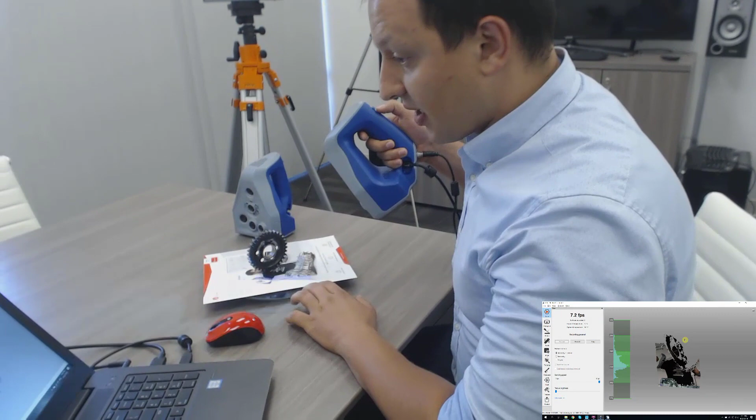So let's take a look at the scanning process with the scanner. Here we have the Artec software, and we're going to start capturing this part. Now we deliberately chose this part because, as you can see, it is a black part and has some reflective portions to make it a little harder. And we're not going to capture the entire part, although we could flip this part over and capture the other side.

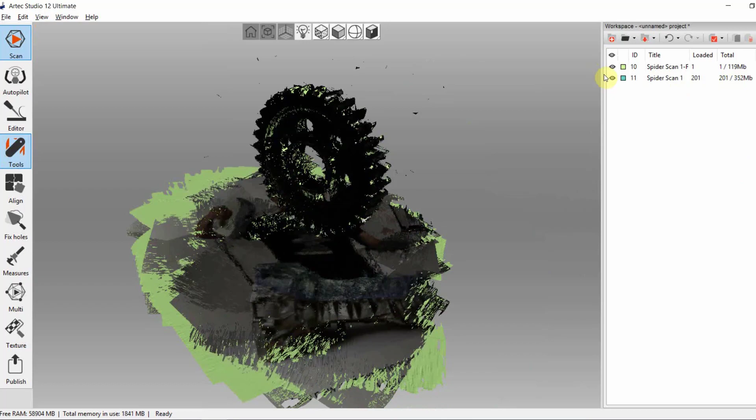So we're just capturing a quick view of this part. I could have probably done this a little bit quicker too, but this should be good enough. So there we go. We have a general overview of this data. We're going to take a look very quickly at how we would process this data here within the Artec software. So here is a preview of the file, and we could export this directly into the software, but it's always better if we process the data using the non-real-time algorithms.

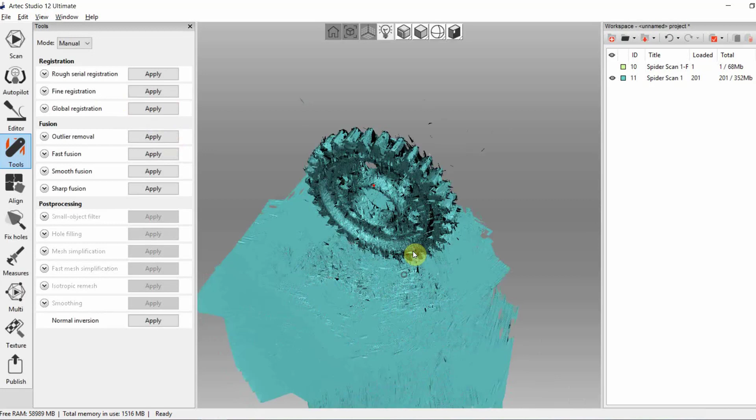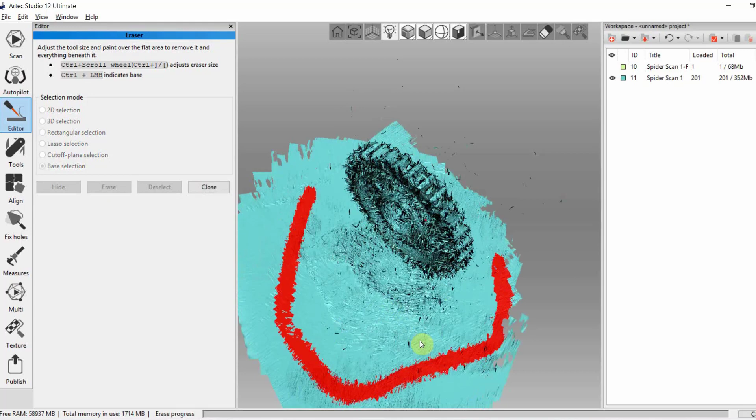So we're going through a global registration step, which takes the data that we captured and tightens the alignment between the individual frames or the individual views of this data entirely on its own without any sort of assistance from us. We can also remove the base of this part, so we don't have to deal with this extra surface within Geomagic for SOLIDWORKS.

And all we need to do now is create a file, an STL file or a mesh file from this part, which will be ready to be exported into Geomagic for SOLIDWORKS. All right, I'll hand it over to Jeff to finish this part as soon as this process completes.

Thanks, Anton. Really quick, let's go ahead and import your part. Okay. Taking a look, it doesn't look too bad. Really quick, let's talk about the UI of Geomagic for SOLIDWORKS. This is a left to right workflow. All of our tools are up here. This is an embedded plugin for SOLIDWORKS, which allows you to bring in scan data or point cloud data and work with it directly in SOLIDWORKS.

We can do that by either importing, or we can connect to some sort of hardware and then scan in either points or mesh, and then do a little bit of mesh or point optimization, and then get that aligned to the global origin, and then take cross sections of that mesh or point clouds and work with it from there. It's really quick. I'm going to do just a little bit of cleanup beforehand.

So I'm going to right click and edit this object. Then I'm going to change my selection tool to the lasso tool, and I'm going to make sure that I have select through on. And I'm just going to really quick delete out these kind of pigtails here.

And same with this area here. Good. So our order of operation today is going to be, we're going to do probably a repair and maybe a smooth, because this looks a little bit bumpy. But then we'll apply some reference geometry to send it to the global origin using Orient Mesh, and then we'll take a cross section of it and then start reverse engineering from there.

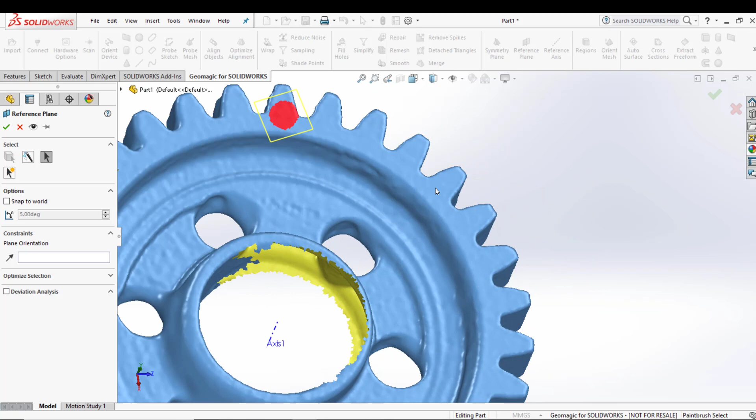Next, I'm going to apply a reference plane. So instead of using Smart Selection, this time I'm going to use General Selection, and I'm going to use the paintbrush method. So zoom in a little bit more. There we go. So I'm trying not to hit any curvature. I definitely don't want to hit anything that's not a plane.

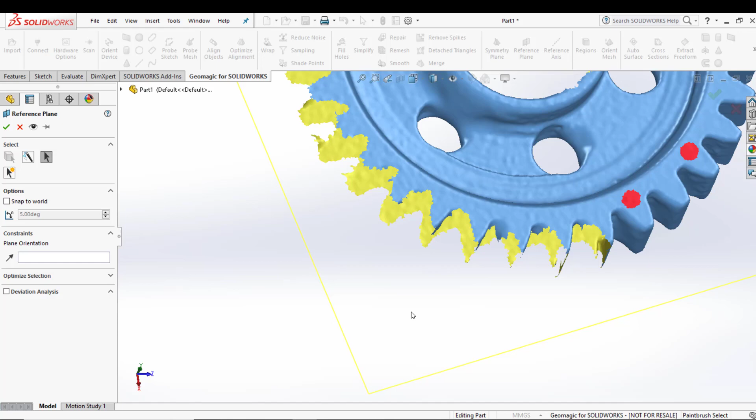And I'm just getting a couple areas here. And maybe one over here. There we go. So then when I rotate to the side, I should see that that plane is right on that edge, and it is. So I'll go ahead and say OK.

So at this point, I want to apply a point in the middle between this axis and this plane. And to do that, I need to go into SOLIDWORKS itself, because we don't have points currently. Well, it's a future release thing, but we don't currently have it. So I'll select the axis and the plane, and I'll say OK. And here we have a point right in the intersection of that axis and that plane.

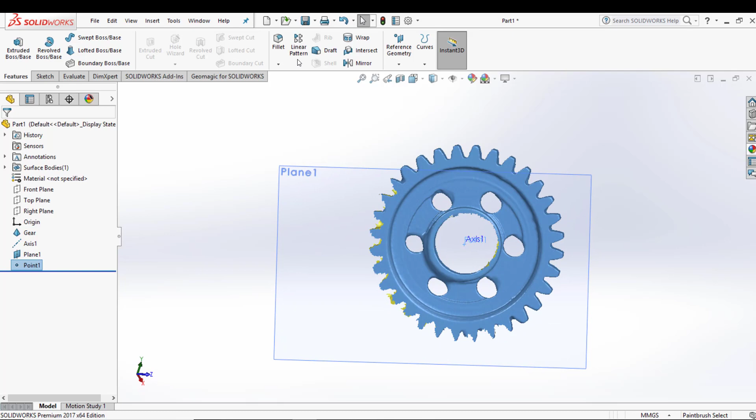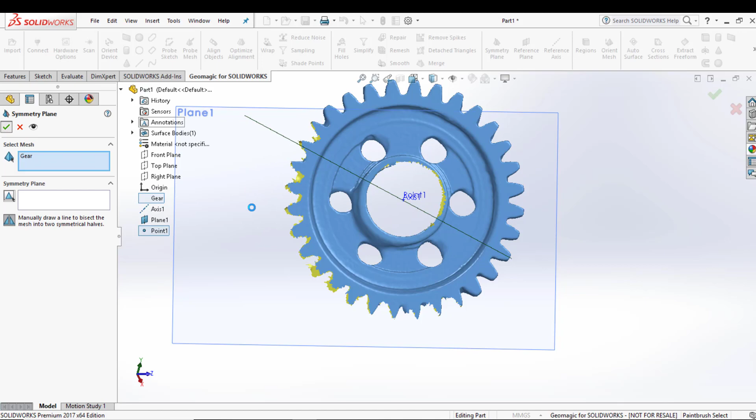Now that I have that, I'm going to go ahead and put a symmetry plane. I'll go back into Geomagic for SOLIDWORKS, and I'll choose symmetry plane, and then I'll just try and find one of these teeth that goes right through the middle, and this looks like a good one here. So I'm going to zoom out just a little bit and then just draw a line. So what this is going to do is it's going to subdivide the mesh in half and then give me that symmetry plane between the two halves.

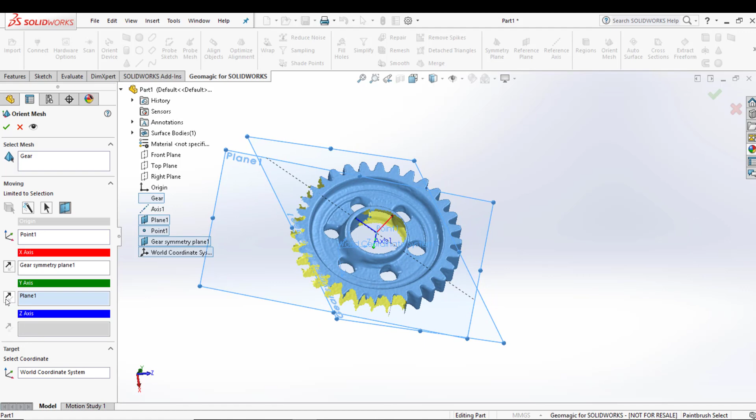Great. Now that I have all this done, I can go to Orient Mesh, and then I can choose the reference geometry accordingly. So my origin is going to be the point. My x-axis is going to be the symmetry plane. And then you can kind of see the global origin taking shape here, or where it's going to end up. And then my y-axis is going to be plane 1. And that's inverted, so I'm going to go ahead and hit this arrow so it's in the correct orientation, and I'll say OK.

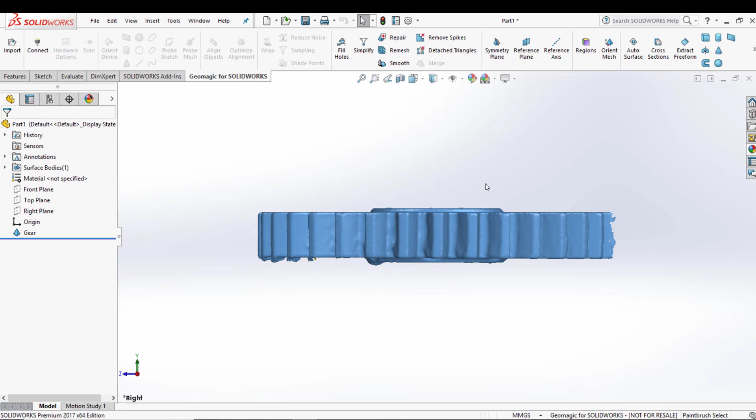So now that it's sent that to the global origin, I can go ahead and remove all of my reference data, or my reference geometry rather, and then we can use our views and see that it's in the correct orientation. Perfect. Now we can begin to reverse engineer this part.

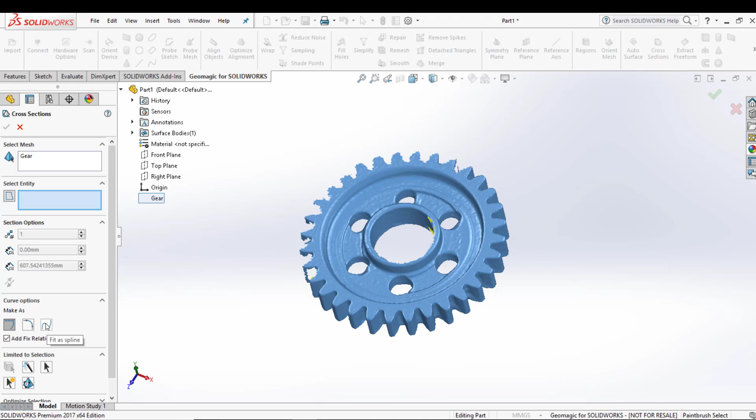So again, I'm going to use the cross section of this mesh, and I'll show you what that looks like right now. We have a couple different options in cross section. We can either use the cross section to make construction lines here, or we can tell it to fit lines and arcs, or we can tell it to fit splines. So I'm going to choose the right plane, and if I zoom in here, we can see that it's giving me a black outline along the mesh. So this is exactly what I'm looking for.

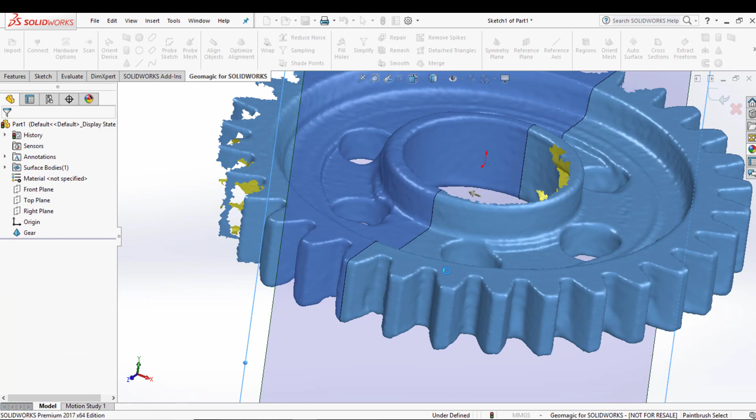So I'll go ahead and I want to do a polyline because I want to make my own lines that are perfect instead of having to worry about the mesh being slightly imperfect. So I'll go ahead and say OK. And you can see, well, maybe you can't see, it's a little difficult, but I'll go ahead and hide that. And now you can see that I have a poly outline of the mesh.

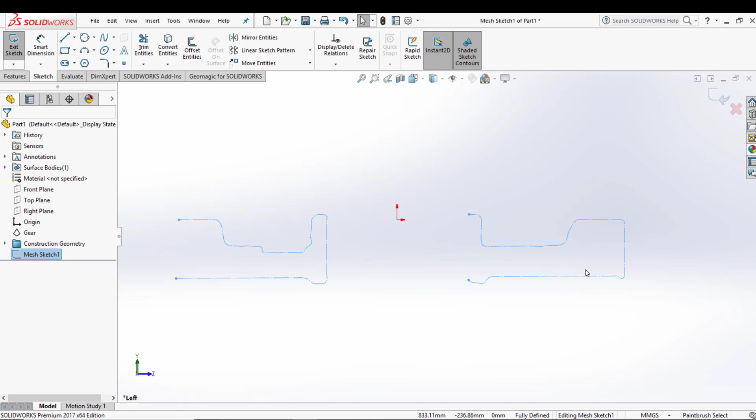I can then go in and edit that, look at the plane, and then start to rebuild it from here. And really all that is just a bunch of sketching and whatnot. So this will take just a second. And basically I'm just going to make a couple boxes. I'll draw a line or two. Oh, that one was off.

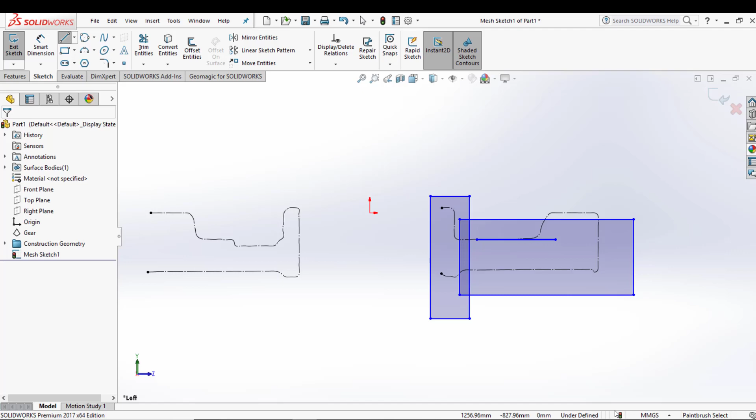Perfect. That looks pretty good. I'll just drag this down here. Move this up to about there. So on and so forth till I've got my fit how I want it. Okay, so that looks good.

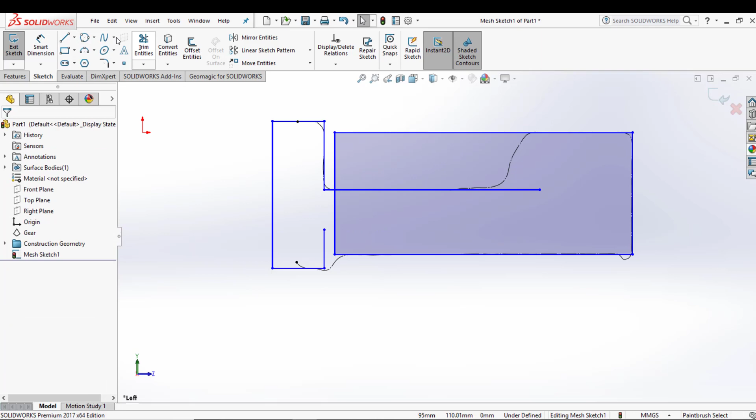Let's go ahead and do some corner trims here. That looks good. I'll add a line here. Oh, let's see. Do another corner trim. Do one more corner trim here.

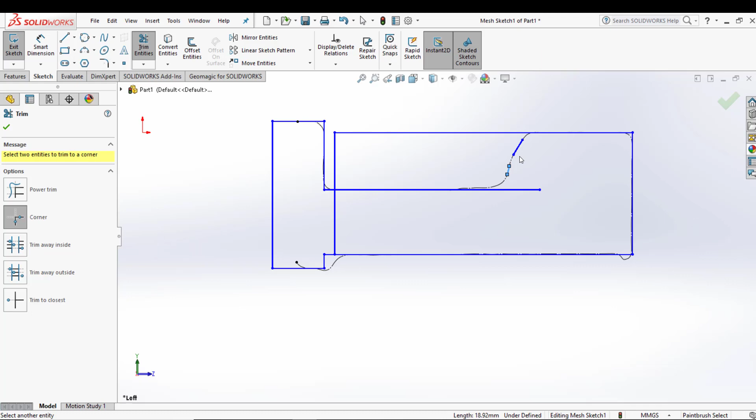Cool, and then I can apply any fillets that I want to in this part. So we can go ahead and just do a couple of them really quick.

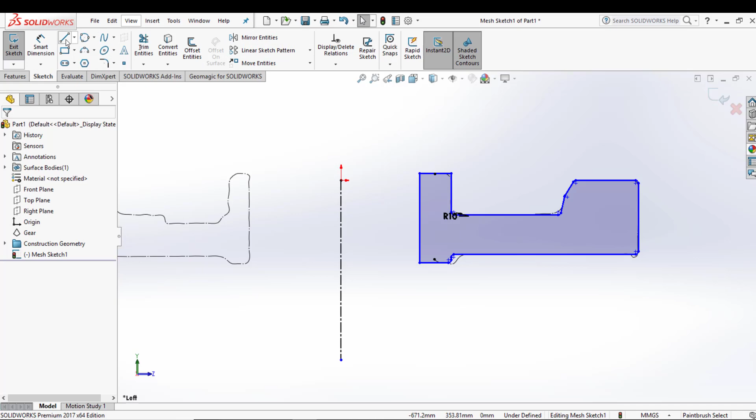And we'll notice here that we don't have the end cap, but this side does. So we'll go ahead and create a construction line. We'll mirror that line to the other side. So we've got to draw a line real quick. Select my entity, select the mirror about, puts it over there, perfect. And I'll just take this piece and move it back.

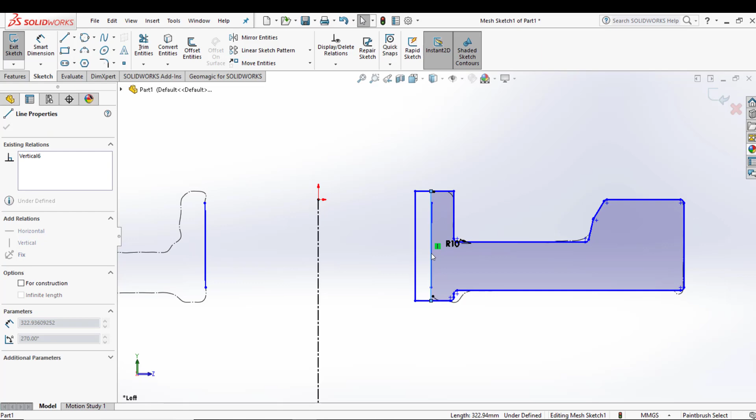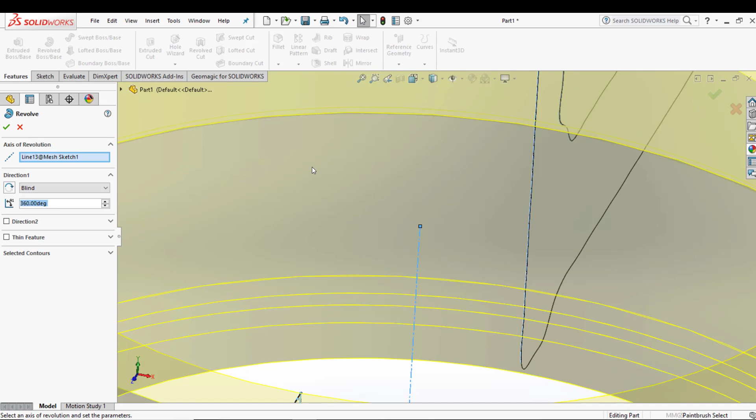Cool, I'm done with the sketch. So then I can go ahead and revolve that sketch using the SOLIDWORKS tools. And I'll say OK. And then I'll turn on my mesh and take a look.

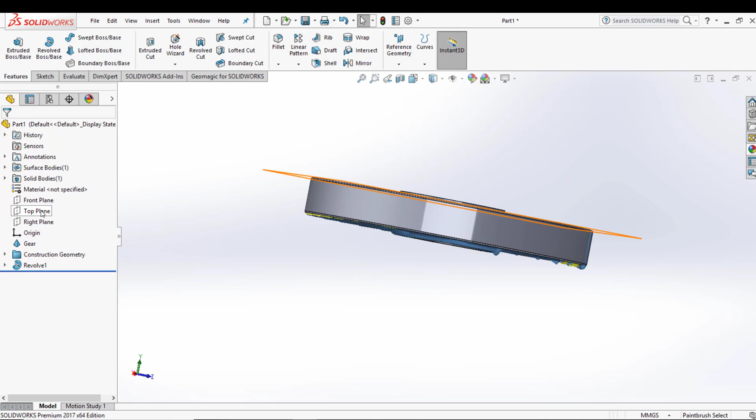And then from there on out, we can continue on adding in different features here and there. And we'll add in the teeth right now, and that should do for this demonstration. Because then it's just a matter of adding in circles and things of that nature, and that's all done in SOLIDWORKS. But this just shows you how well you can use mesh and point clouds in SOLIDWORKS instead of having to go outside.

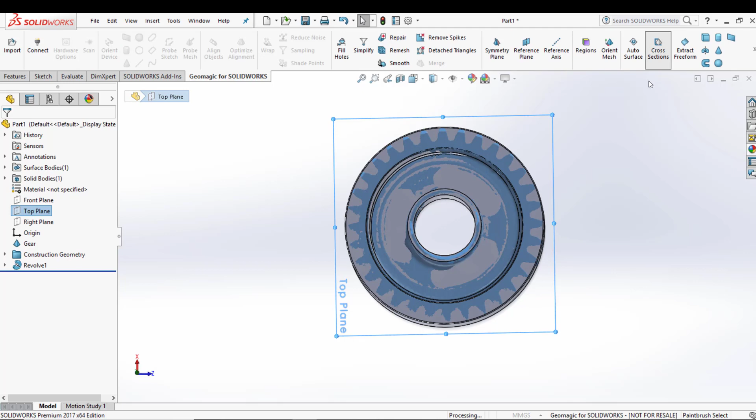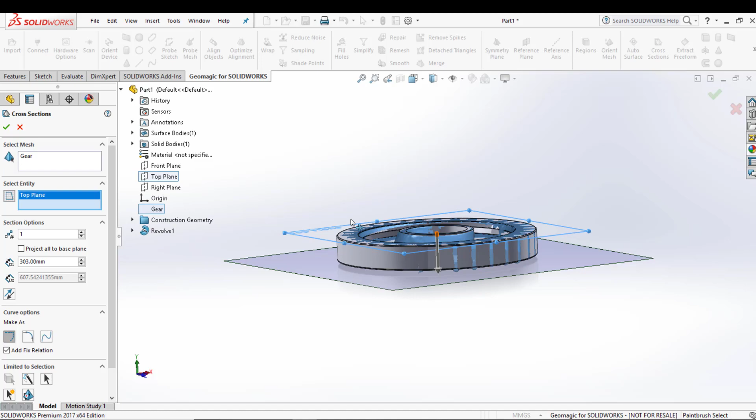So I'm going to use the top plane, go back into Geomagic for SOLIDWORKS, take a cross section using my top plane, and I'm going to use this little arrow here, and I'm going to drag that top plane down just a bit so we can really get a sense of those teeth. And that was too much, so I'm going to pull that back up a little bit. There we go. I'll go ahead and say OK to that.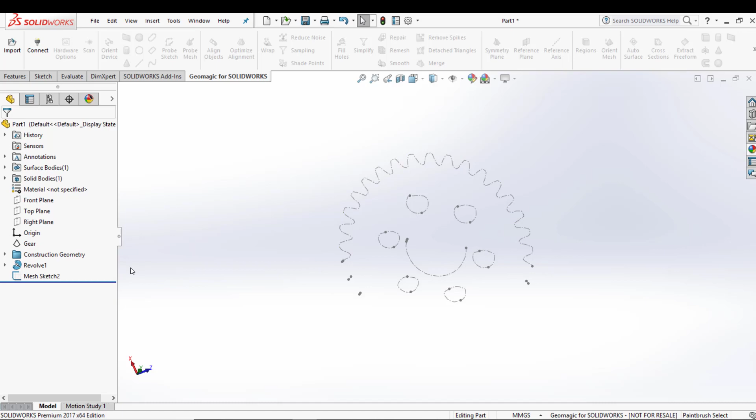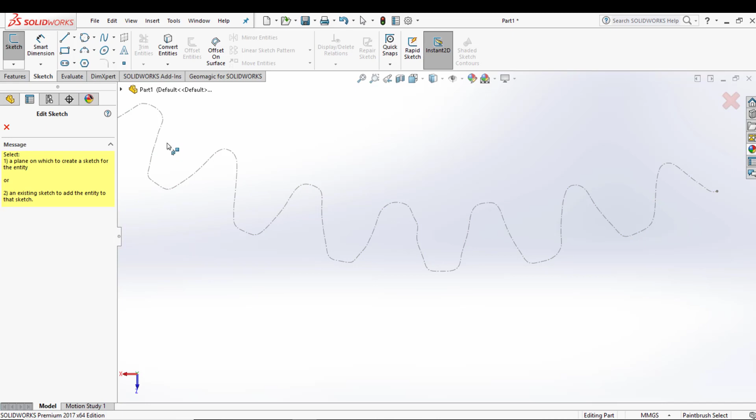And then again, hiding all these features, I now have that outline of the teeth. So I can take a look at this. If I remember where my right plane is, that's that piece there. So I'll go back into the sketch entities within SOLIDWORKS, or I'm sorry, I'll edit this sketch, and then I'll recreate this piece here, and then I'll pattern that.

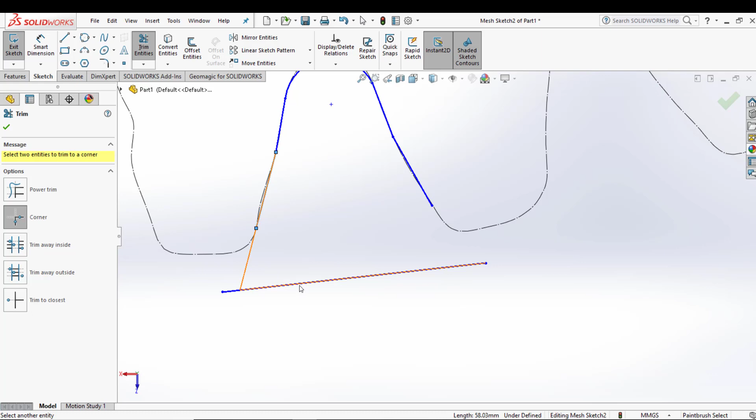Now that I have that done, I can go ahead and pattern that piece based off the center. So I will go in and select circular pattern. There we go. And then I'll put in, I think it's 27 instances. Nope, it's not. It's 32.

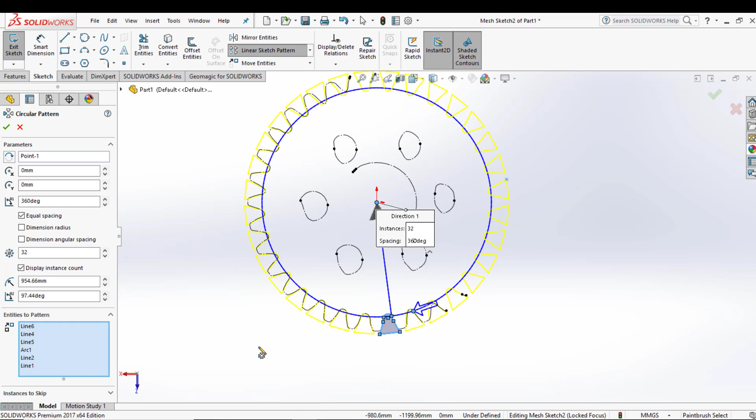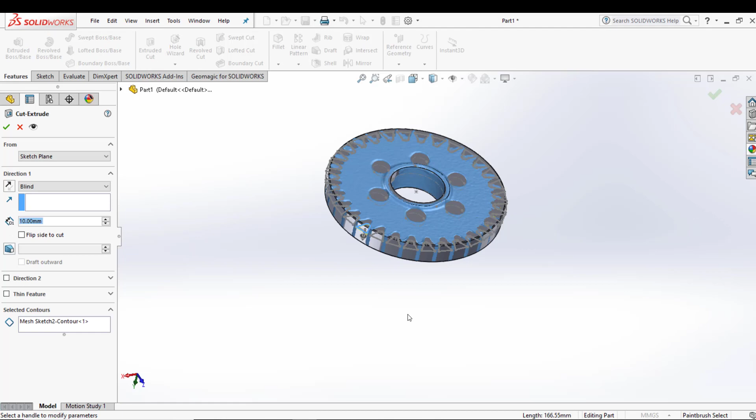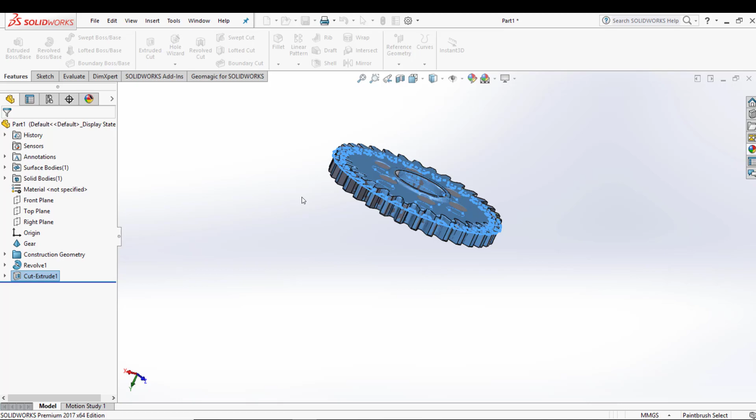Great. Now that I have that pattern, I can turn on my gear, turn on the solid body, exit that sketch, and then do an extrude cut with these profiles. Oops, I gotta select them. There we go. Extrude cut. I'll go in the opposite direction. I'll say OK. And that's how you reverse engineer.